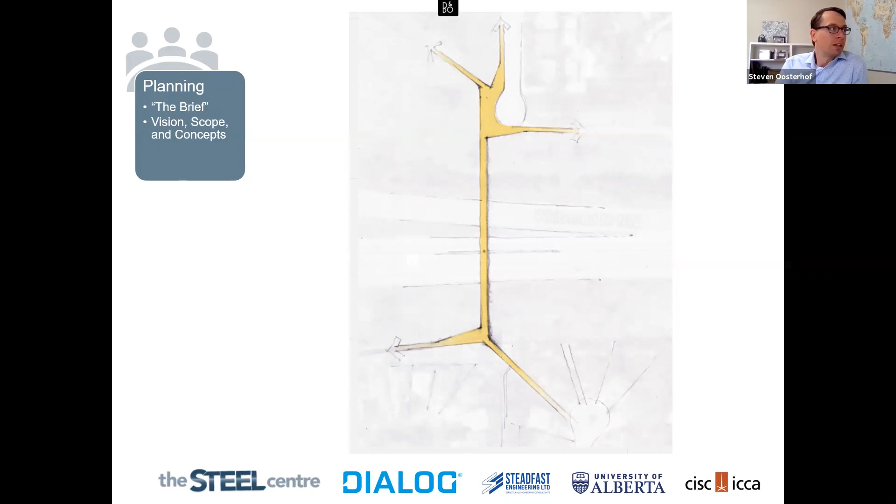So once you have a clear understanding of the problem you're trying to solve, you go into the design phase. And as a structural engineer of record, this is where the majority of my time day to day is spent. And this is everything from coordination meetings with other disciplines to detailed calculations to drawing preparation to checking drawings. All of those things are part of my daily life, building structural models of things, putting loads into them, getting designs out. I would say I spend more than half my day doing that kind of stuff, all related to this design phase.

The progression of design, from a concept to a detailed set of drawings that somebody can build. I really love this process. I'll illustrate it here. This is that same bridge that I just showed the overall problem statement for. And on the bottom, I drew a free body diagram, this is a bending moment diagram with the span arrangement, and figured out where the peak moments are, and then started to sketch up, well, what's a concept for a bridge that responds to these forces along the length of the bridge.

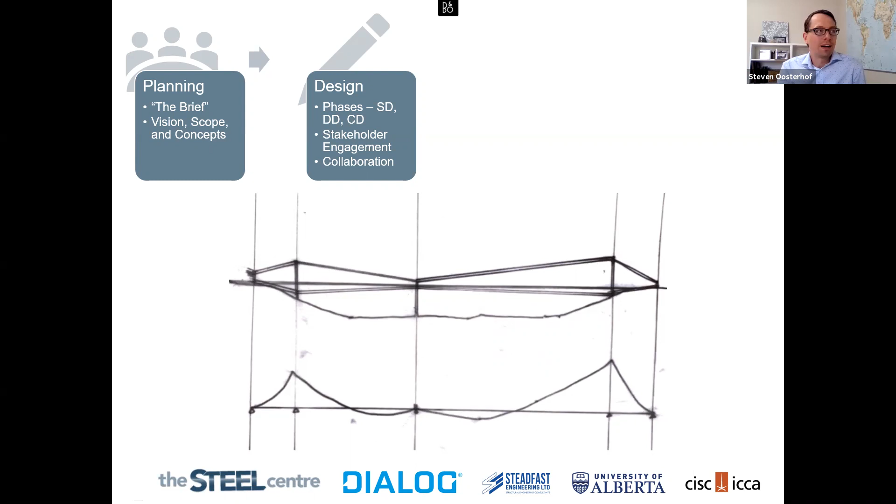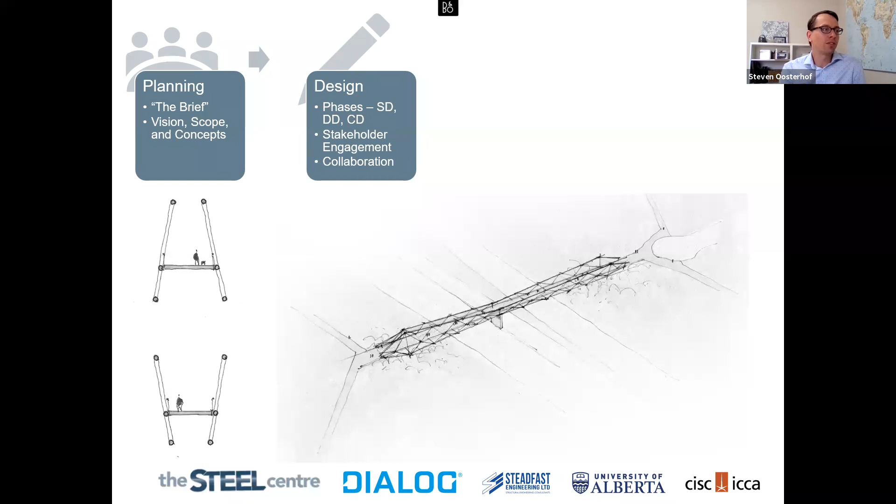So very early, I've got a pile of 20 of these, just sketching up different ideas for how to solve the problem. And then you progress from this concept and sketch level to refining the concepts a little bit, refining your sketches so that it's something that people can understand and you can socialize with your client who's building the bridge, with the public who cares a lot about how this bridge looks because it's right in their neighborhood, with the other design disciplines, the architect and the civil engineer and the geotechnical engineer. So you start refining that and sharing that to better define the design that you're working on.

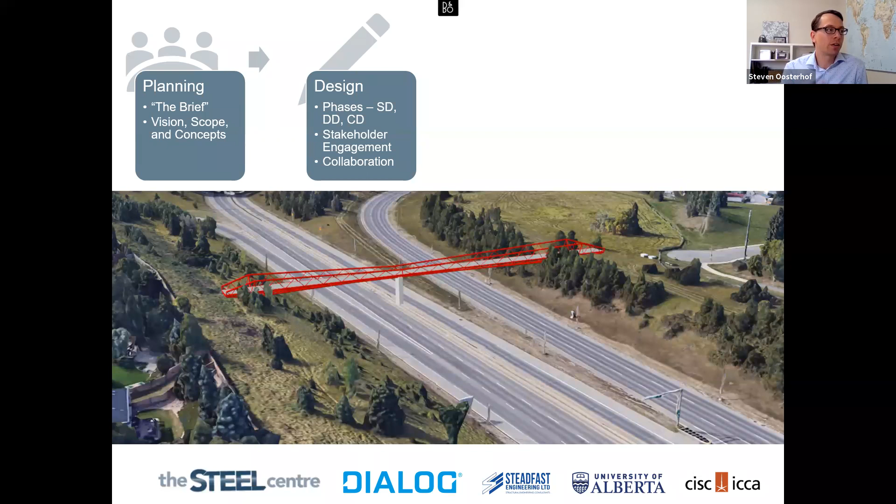So then you take that feedback, you further refine your modeling and your design till eventually you get to construction documents or contract documents, where every detail that's needed for a contractor to bid on this, to say how much it will cost them to build it, and then eventually to build it, is on a technical set of drawings, like you see here.

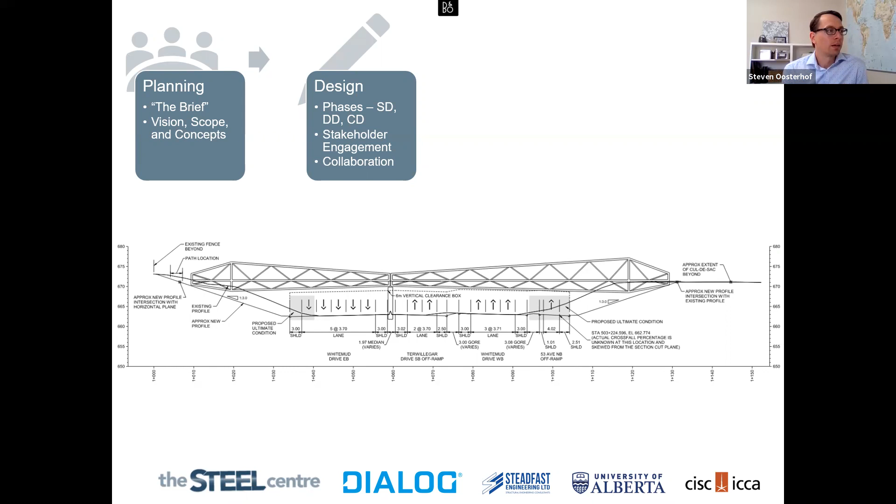So then that is all done to get you to a place where you can actually build it. And this is at the heart of why I love being a structural engineer, this idea that you can have an idea and you can create something to solve a problem, but that it doesn't just live inside of the computer or on a drawing, but it gets physically manifested.

And it is the coolest thing to work on a project for 6 months and to walk out on site and just see these massive steel connections that you've calculated the capacity of those bolts, and you've thought about how that structure will behave and deflect, and to actually see it built is, I don't know, for me, it's the ultimate job satisfaction and really cool.

So our role as engineer of record, as a structural engineer, is to stay involved throughout construction. So we actually go on site. We look at how things are coming together. We address issues with unforeseen site conditions. We answer questions and make clarifications because, first of all, no set of drawings is ever perfect. And second of all, no set of conditions under which you're building are ever perfect. So you try to work together with the builder to solve some of those issues.

And another important thing to understand, which I didn't really understand until I started working, was this idea of delegated design. And that's where Dean's role really comes in. And I'll let him explain what delegated design is and why it exists, and what his role as a structural engineer, a delegated designer, is on a project.

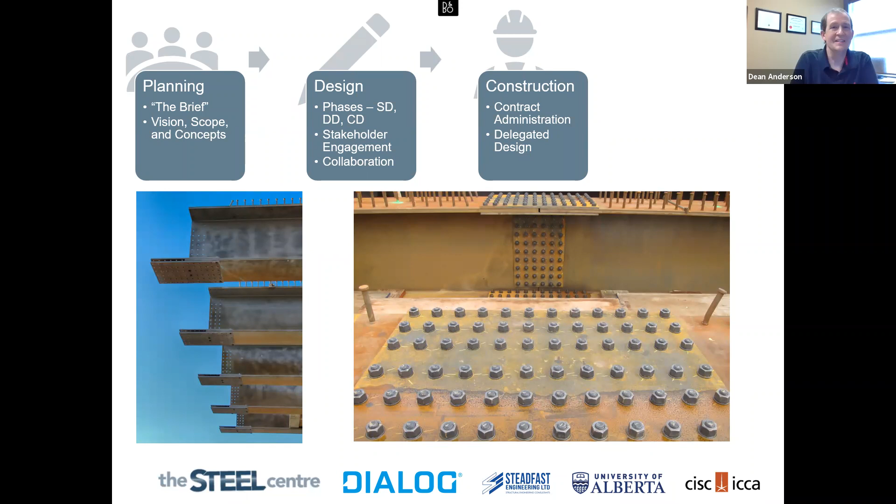All right, thanks, Steve. Yeah, delegated design comes downstream from Steve's perspective. He's talking to some guy who wants to build something, or some group of people that want to build something. He's solving that problem to try to get that done. Then as it goes down the process, there's a reason that they have delegated design with respect to connection design, which is what we do at Steadfast, after a fabricator is hired. So this is down in that construction process.

So the contract documents have been essentially completed, hopefully fully completed. Sometimes that kind of comes a little bit earlier, but hopefully those construction documents are completed. We have a full set of drawings, and they put those drawings out for tender. So different steel fabricators, the people that are actually going to build this, they're actually going to weld all the connections, put all the bolts in, put it up on site. They bid on the job, and they say, okay, you're going to pay us this much money to build this project. Several people put in their price for that, and one is chosen.

And that connection design that's delegated to those fabricators is delegated out because different fabricators have different processes and systems and ways of doing things. I've worked with, I don't know, probably 100 different fabricators, and I'm still surprised when I think, based on my experience, that this is the way they're going to want to do it. They still say, oh, no, I don't want to do it that way. That way doesn't suit my processes.

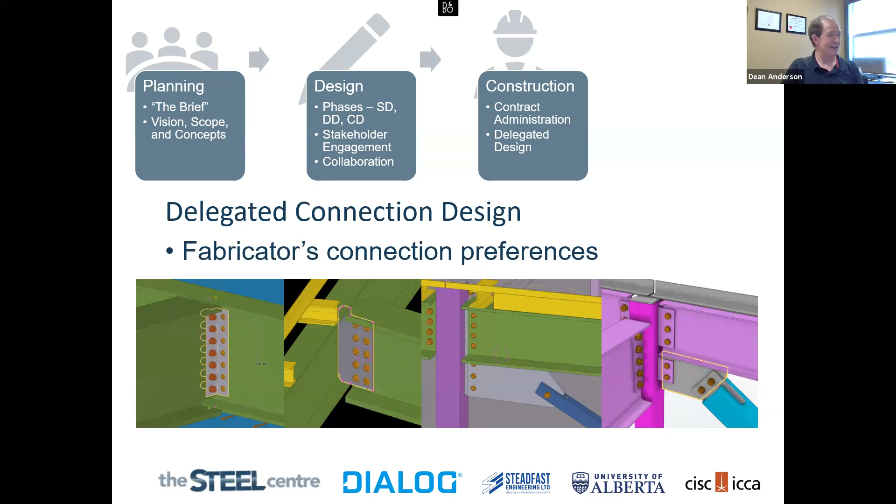And it's kind of funny. This is one thing that actually took me by surprise a little bit. I was kind of old when I went back to university. I was 10 years out of high school when I went back and got my structural engineering degree. And I got into that mindset that what you learn in school doesn't apply in real life. And I think some people have that mentality.

And I thought it was so fascinating that in the structural engineering career, and especially connection design, it's like solving a CIV E 270 problem. You actually have to make a free body diagram. You actually have to figure out all these forces, just like in Steve's sketches earlier on, where he's showing the bending moment diagram. You actually have to do these things to solve your problem. So I thought it was awesome that the tools that you learn in school, you actually apply. And you have to write these things out.

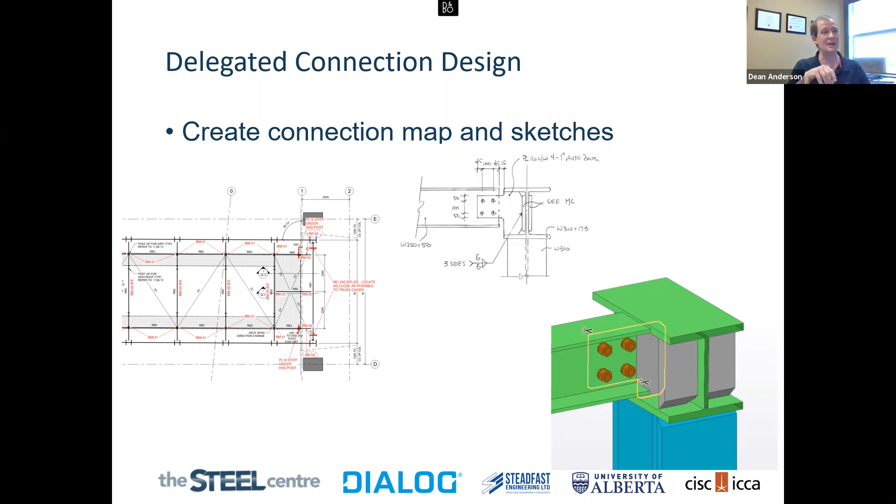So we have the sketch in the middle, and then that actual connection is shown in the model on the right. So if we go to the next slide, we give this information to the detailer. So the connection designer makes his map, makes his sketches, and gives that to the detailer, the draftsman. He takes those things and he makes his three-dimensional model. So that's the picture on the right. Just so you know, this is what we're going to look at as our case study later on. These are the drawings from that project that we're going to look at in a little bit.

So he makes that three-dimensional model, and the software creates a two-dimensional drawing from that model. He does this, and we communicate on the way. Again, communication is key to this whole process. The detailer has a question. Maybe you misunderstood something. Maybe you didn't quite get how the geometry of something worked out based on the two-dimensional drawings that you're working off of. He's going to ask questions. You're going to collaborate, figure things out, and come up with the connection based on that. So he creates those two-dimensional shop drawings from that model, and they're called shop drawings.

So Steve was mentioning contract documents, structural drawings from his side of things. The shop drawings that are created from this process are something that somebody in the shop, hence the name shop drawings, can actually take and build this thing. So everything's, again, down to the millimeter. Every weld, every bolt, every dimension is shown on this thing. So a guy can actually make this in his shop. So he makes these drawings and then he sends them out for approval, as they call it.

So there are two stages for shop drawings in a construction project, generally. They have issued for approval. So this is the chance where all of the different parties that are involved can look at those drawings and say, hey, maybe this is right, or maybe this isn't right. And they can point out things that are either misunderstood or maybe not shown correctly. So the engineer of record, like Steve, and the architect, they send them to me as well as the delegated design engineer. We'll review these drawings in detail. And especially the connection designer is going to review these in full detail because that is their final product that they are going to stamp.

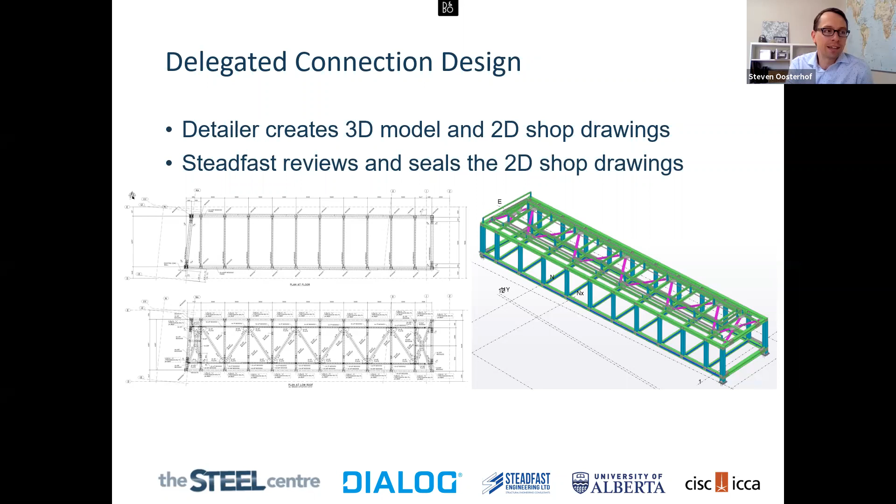And so we'll end up marking those up and asking questions and really making sure that the design that was done downstream from us satisfies the requirements that we had in mind when we sent the drawings out. So if you ever hear about shop drawing reviews, like Dean said, I don't know if I've seen 6,000, but I've for sure seen shop drawing sets that are approaching 1,000 drawings, and the review process is quite intensive.

So this project, it's a fun one. I've presented on this before when it was first built to probably some of the same people on this call, but we're going to zoom in specifically to the Pedway that connects this office tower that was built probably about 5 years ago. And we're going to look specifically at the Pedway and try to walk through what our role was as structural engineers on the design and construction of that Pedway.

So thinking back to the process of a typical construction project, the big idea here, the problem we're trying to solve, is that we're building a new office tower. And the tenant that was leasing up that office tower also had a lot of offices in Manulife Place across the street. And as you know, a lot of downtown Edmonton is actually connected with Pedways, so that you don't have to leave the buildings to get from one to the other. You get all around downtown.

You can even see in this image, there's a Pedway here. There's another one at City Centre here, and this is the Pedway connecting this new building we were working on with this existing building. So very simply, the problem statement here was how do we connect these two buildings? So we designed this Pedway.

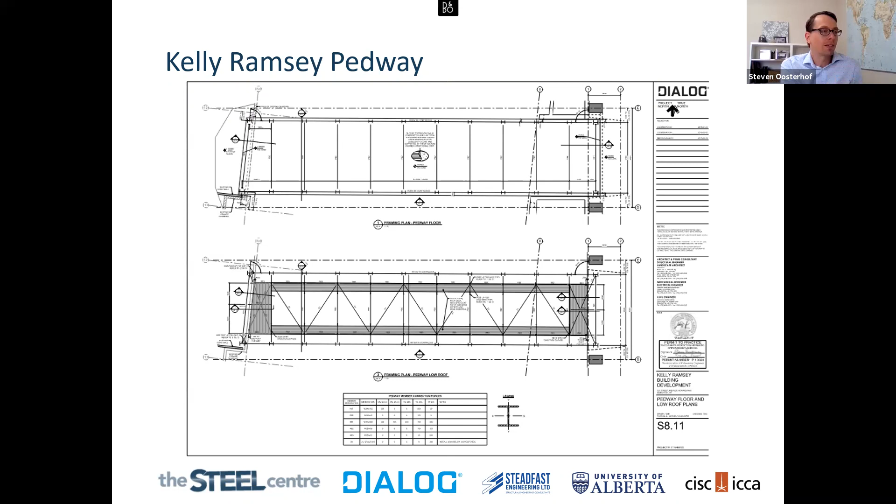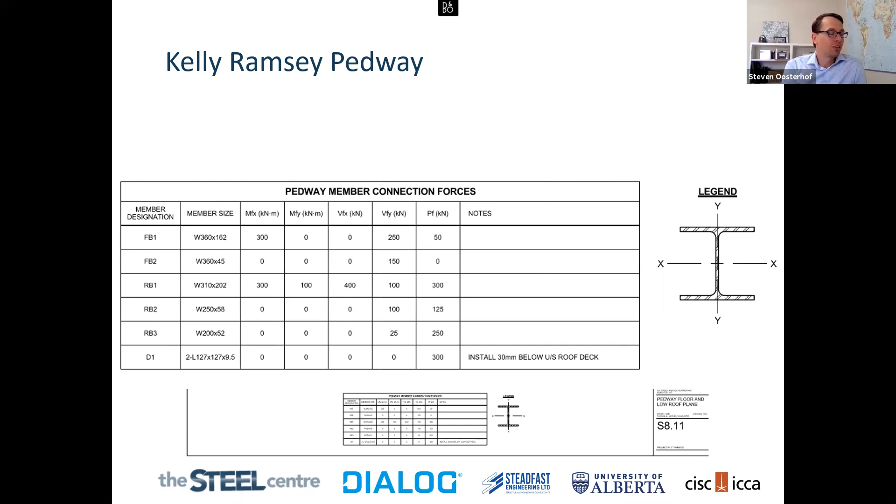So we had a lot of really highly stressed nodes on the project, and those connections were delegated to the fabricator. Now, this is the final contract documents that went out for the job. At the bottom, there's a table, and that table simply identifies the different members making up the truss, and then the connection forces, so moment, shear and axial force that connection needs to be designed for. So this is the information that we then passed on to the fabricator, which was Dean. Well, Dean was the fabricator's delegated design engineer.

Yeah, so we got hired by the fabricator to design these connections. We're happy to. It was a really good project to work on. I like working on these interesting ones. You don't see a lot of Vierendeel trusses. It's interesting to see this kind of configuration. And it was interesting with those high loads, those high forces. These wide flange members are actually pretty heavy and pretty thick, and actually quite small. So they're small and thick. So very interesting to design those connections to make everything work.

So we got hired back in October of 2015. So this project is like 5-6 years old. I know it stretched into 2016 during construction. But one issue that we had with this: on the left, you see the Pedway as a whole, and on the two sides, those are the Vierendeel trusses. You see, there's no diagonal bracing on the two long sides.

The fabricator had to build this. They had to erect this. So they had to figure out the best way to put this thing up. One of the parameters they had to meet was that this spans over a road. So they have to stop the traffic on the road. They've got to put a crane up.

They got to build this thing. And the thing that they had to do was they had to block this road, build it throughout the night, and be done in one single night. So that was their challenge. And they had to figure out, okay, how are we going to do this? How are we going to make this work?

And Steve can correct me if I'm wrong, but I believe at the time, those end boxes, the two little boxes that you would walk through at the end, those were fully rigid frames with no connections in them. And so for them to build this thing as a truss, or to build this thing on site, they have to split this thing down the middle essentially.

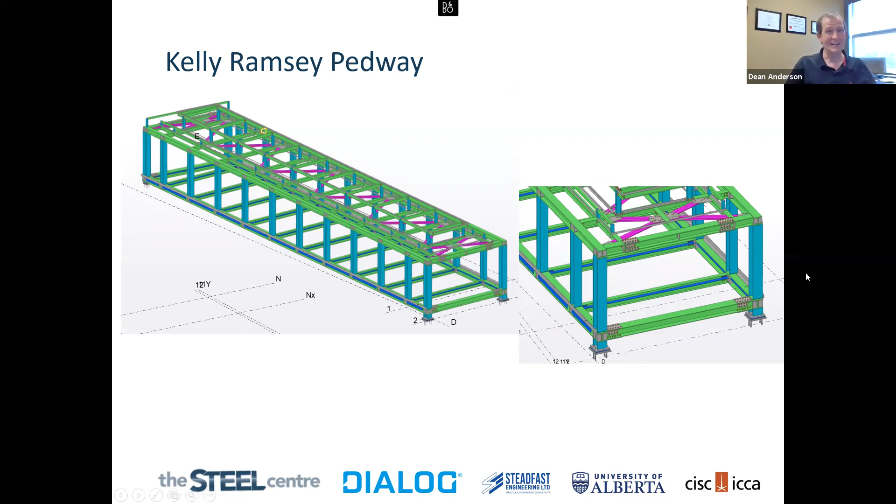And again, back to what we've all said up to this point, communication is key. Making sure you're figuring out the best way to do this. The next slide. This is a little bit of the back and forth that Steve had. So this kind of ties into a little bit about what real life is like as well as an engineer.

So one of several. So I sent Steve an email and said, hey, fabricator wants to splice this thing. He wants to splice it as close as possible to the truss, so he doesn't have these big legs kind of sticking off of the truss, so it's easier for him to ship and get to site. So what is the best place to splice this thing?

And I talked about and kind of discussed where is the best place, because sometimes some engineers are not so helpful and they don't want to give you the loads and they don't want to discuss things. I was very happy. Steve is awesome to work with, so he is willing to have this discussion. A lot of the time, they'll just come back and say, design it for full strength, because that's the safe answer. It takes 2 minutes to say that in an email, and then you're done with it.

And that's something that, as a connection design engineer, I hate seeing the words full strength, because it's very difficult to design a connection for full strength. Well, it may not be difficult for me, but I know it's difficult for the fabricator. It's hard for him to build these things. They often get so big and convoluted because you got to transfer that full force of every part of that beam through the connection. So it tends to get really big and really ugly.

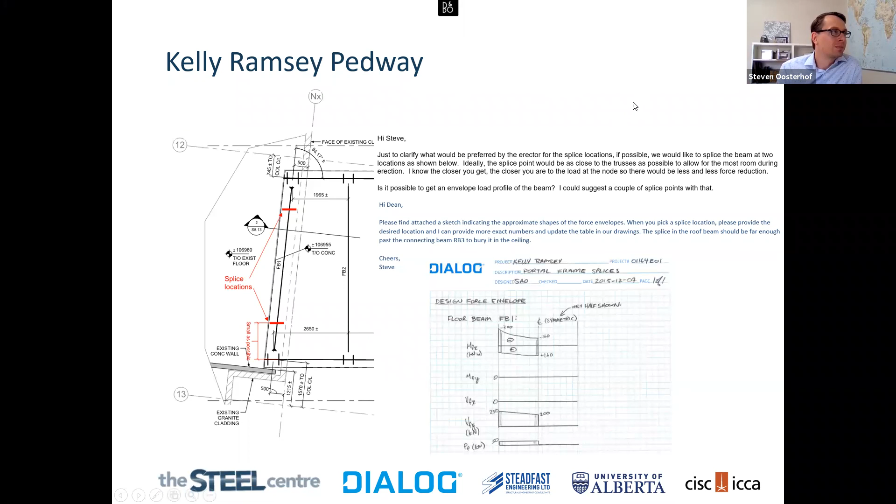Okay, right on. Yeah, the next slide here is the final product. So Steve and I went back and forth. We came up with the location. We came up with the loads. Well, Steve came up with the loads. Then I designed the sketch, which is the picture on the left, gave that to the detailer, and he put that in the model, and that's what was actually built. So that's the way they were able to do it.

Steve can probably comment a little bit more about how the thing actually went up on site, but they were successful. It took them 1 night to build this thing and put it up. They were able to put those trusses up on the sides with, I guess, a little bit of difficulty from what Steve was telling me before this presentation, but they did do it, and they were able to bolt all those members in between, and they only blocked the road for the 1 day. So it was successful that way.

So it's kind of nice to be part of that whole process of being issued a problem that we both could work together to come up with a solution that did satisfy all the parties involved. We have a solid structure. We have something that works, something that is brought up even now. Steve was mentioning a couple of days ago when we were talking about how somebody went through the city and said, we really like this Pedway. We want our Pedway to look like this awesome Pedway, without the knowledge that Steve actually designed this Pedway in the past. So it's something that lasts, something that works, something that looks really good, and something that was able to be built effectively. They were able to do it, and they were able to meet their goals. And it was really nice to be a part of that process to achieve that as a whole.

And that's part of what it's like to be a structural engineer as a job. It's not just crunching numbers. It's talking with all the people to figure out the best solution for the problem that does satisfy as many people as possible. Everybody's got to give a little bit to come up with a compromise, but everybody can do that, and it can work. So it's really good to have people involved in a team that can do that to make something like this project, which was pretty successful. So I'll hand it back to Steve. He's going to talk a little bit about how the thing went up in construction.

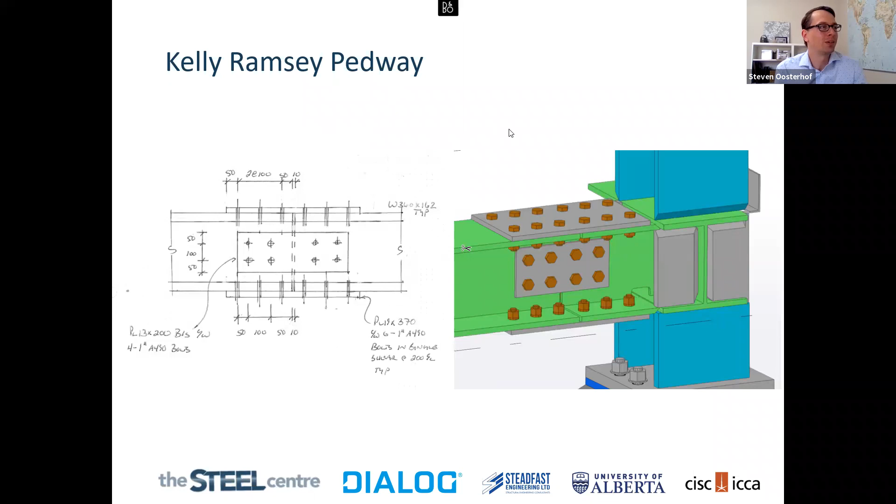And they erected the main trusses overnight. Dean mentioned there was some problems. I have time, I think, to tell this story. So we're going into two existing buildings, essentially. The Manulife Place is what you see there on the left, and then the new building that we had just finished building on the right, the Kelly Ramsey building, or Enbridge Center as it's called now. And so the anchor bolts to receive the bearings for the bridge, they were cast in on the one side 2 years earlier, before the bridge was even detailed or designed. But we figured out the anchor bolts and got them cast in.

And as a rule, I don't give out my personal cell phone number to contractors because they will phone you like all the time. So I try to set up clear boundaries on how we communicate and when. But in this case, I knew they were doing this big lift overnight. They had downtown shut down. So I gave my cell phone number, and it rings at 3 o'clock in the morning. I'm like, oh no, what's going on? So I pick up the cell phone, and it's the site super who's putting up the bridge.

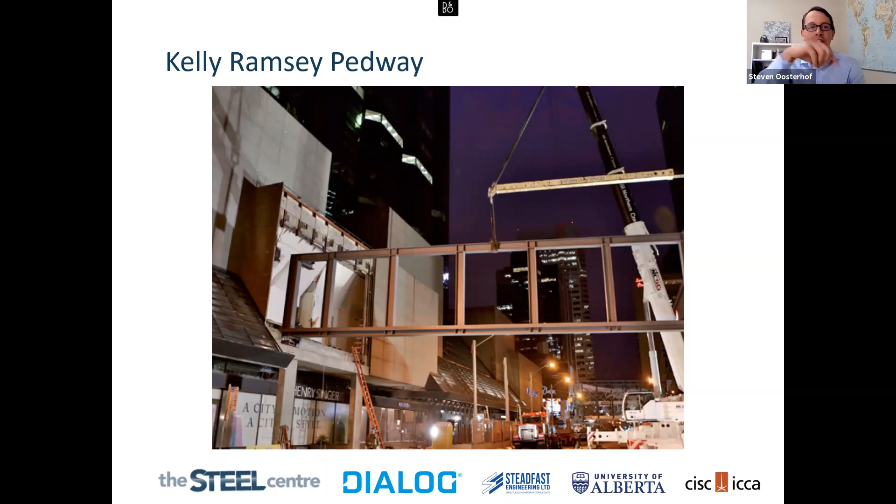It's got this beautiful marble flooring, which is very heavy, by the way, which is part of why my members were so thick, Dean. But also, it actually helped us a lot, because we were worried about vibrations on this bridge too, that you could feel it bouncing up and down when there's a lot of people walking through. So having extra mass helps you with vibrations, because it takes more to get the structure excited.

But yeah, that's kind of just a walkthrough of the construction process, start to finish, and the roles of us as the structural consultant and Dean as the delegated design engineer, and how projects get together. Maybe just a bit of a glimpse into what we do every day. And I hope it was helpful or interesting.